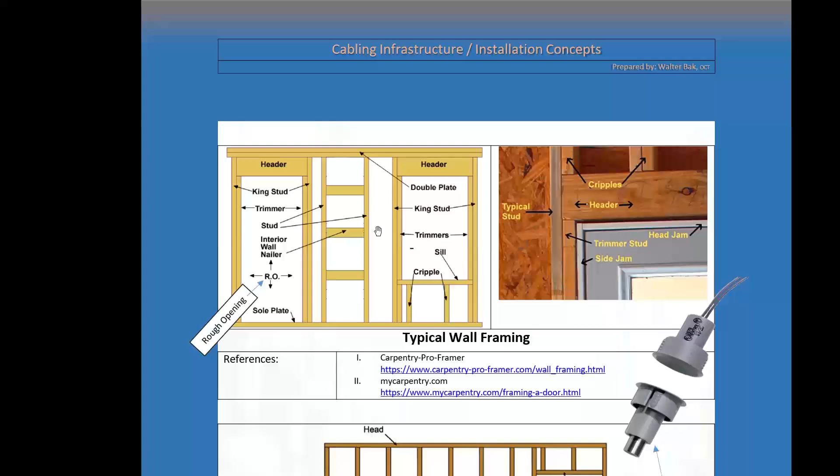Any kind of wiring has to have independent suspension from any of the ceiling structure, like the ceiling tiles, right? So that said, let's go in to see what we can expect. I'm going to divide this into more than two parts, but I'm going to start with the differences between residential and commercial, which also splits into another two aspects: framing.

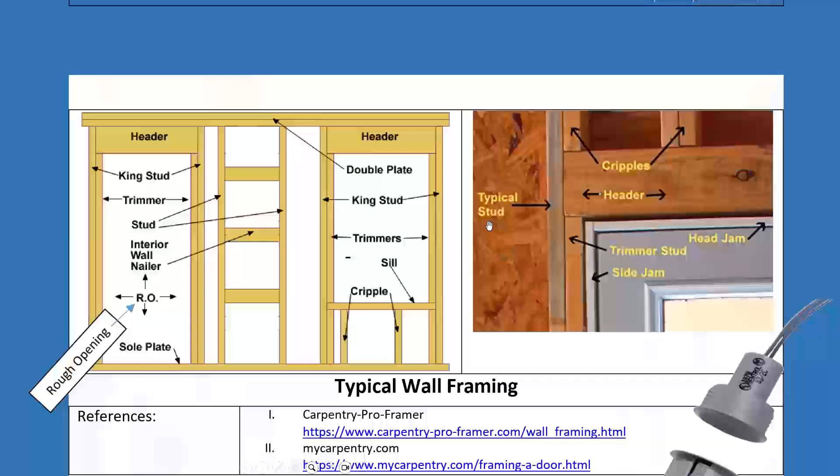The framing that we're going to be dealing with is either going to be timber wood framing or steel framing. Slight difference between those two for us, okay? We're going to talk about what we are interested in as far as the differences between those two. Since for us the timber framing is more complex, I'm going to spend a greater deal on discussing the timber framing structure than the steel, because steel is actually quite easy for us. However, it's mostly done in a commercial

setting in Ontario. Here in Ontario, the business structures, stores, malls, whatnot, most of the framing you're going to find is steel. However, if you go to some of the western provinces, I don't know about the east, I have never been there, but I've done some installation in the western provinces, then residential or commercial, you're going to find a lot of timber. So that's what we can expect when we go there.

So when it comes to typical timber installation, what is it that we're up against when installing wiring? Rule number one for us is try to get into the window of opportunity as far as timing. Especially in a residential setting, we want to be there with our cabling before the drywall gets put on. So here is the bare framing, and we can see what's there. We can install our devices.

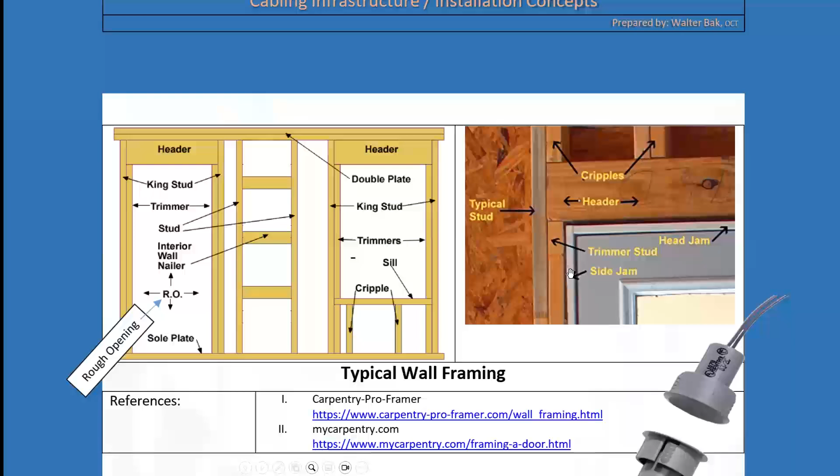Some of the more difficult or more complex devices to install would be security devices. For example, here is a security alarm, a so-called door contact. This one is a flush door contact as opposed to a surface mount door contact. So here's the door contact and here's the door. Put the door contact on the door. Put the ball in the net, right? Simple as that. Well, if we are there before the drywall gets put on, then we have a fighting chance, right, with the timber framing.

When we get there after the drywall is installed, then we're going to have a little bit of a conversation with the client, because if this needs to be installed the way the client wants after the drywall is put on, then we're going to have to talk about the possibility of some drywall that will have to be disturbed here and there, right? And if the client doesn't want that, then we can't do the job, or we can go to the alternative, wireless devices. Sometimes we can get away with that, sometimes we can't.

There were a few jobs in my past where the deal didn't go through because the client wanted to do residential. That's why I was always trying to stay away from residential, as far as retrofitting goes, when people are already living in the house and they need to install some things there. You have to go there, take your shoes off, their son and daughter are eating sandwiches while watching TV, and there's some kind of a fluffy dog that tries to sniff you all around. And then you're going to really have to spend a lot of time doing the wiring.

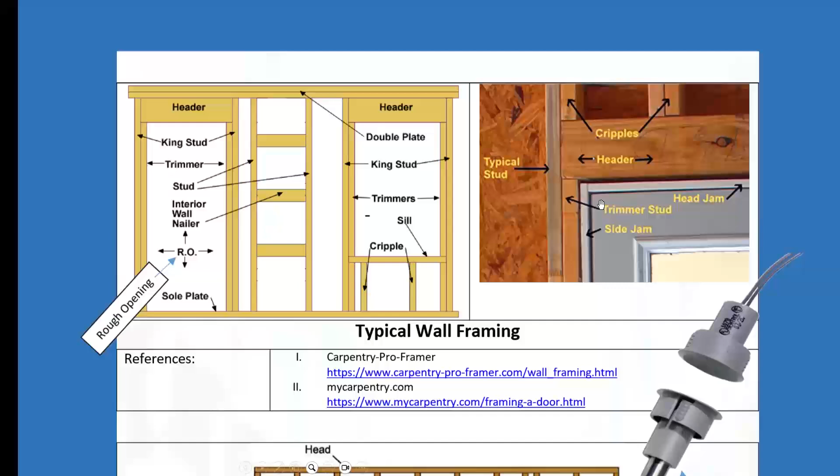So, what is it that we are dealing with? Here's a typical wall framing, one of the scenarios here. What do we have on the bottom here? We got a sole plate. Then on the top we got a double plate here. That's timber, that's wood. Well, 2x4, 2x6. It's not exactly 2 inches by 4 inches. 2x4 is slightly different dimensions, but close to that.

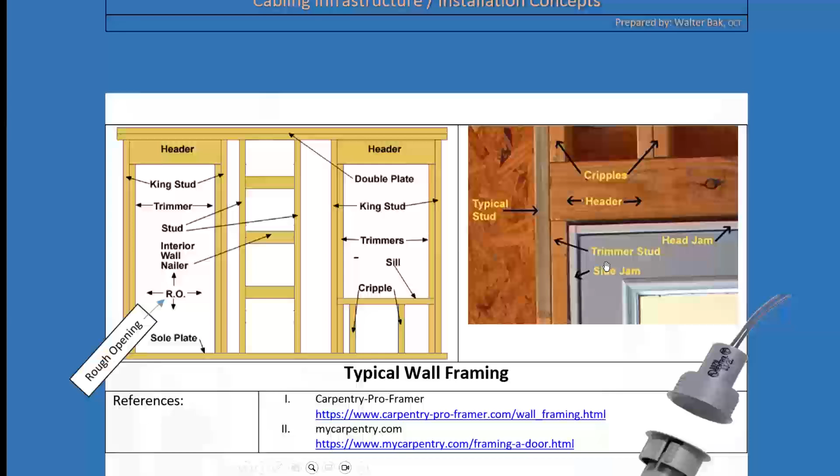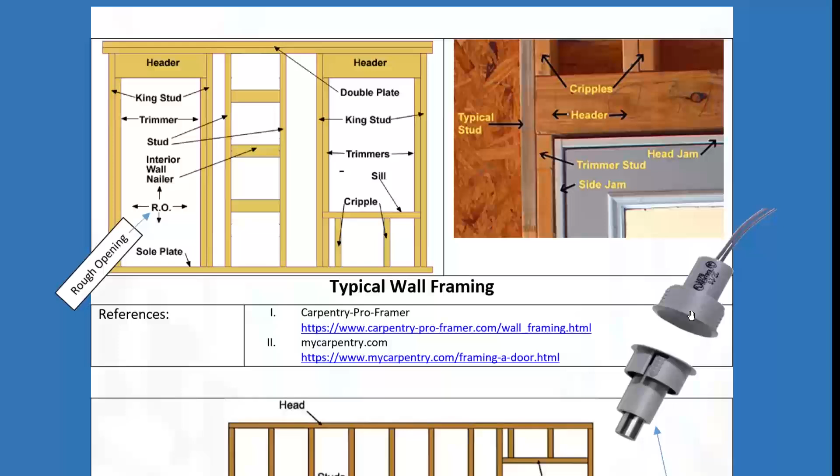Right? So we need to drill through some of the structure. So, for example, if we are to install a door contact, and basically this is in security alarms, this is called a door contact. What do we have? We have a reed switch. What's a reed switch? A reed switch, it's like, for example, a saxophone mouthpiece, there's that reed there. So the switch is in that form. When you bring that magnet close to it, the switch closes.

When you bring the magnet out of the way, then the switch opens. So it's a dry contact switch, passive element. It only requires one pair to operate, and it does not require power to operate. Right? It's just a switch that closes or opens.

How are we going to install this? Okay, this wired part is going to go in the framing here. And this magnet is going to go right in the door frame. So when you open the door, the magnet goes away from the switch. When you close the door, the magnet is going to be in close proximity. So that's how this switch operates. Well, how is it that we're going to wire that?

We have the opportunity to either drill through that door framing here, and maybe drill here, through here, and then you have some sort of freedom of how to run the wire further, or you can go all the way up here, and then you can go either into the ceiling space, or you can go into the space between the studs or the framing, and you can take it up or you can take it down depending on the situation.

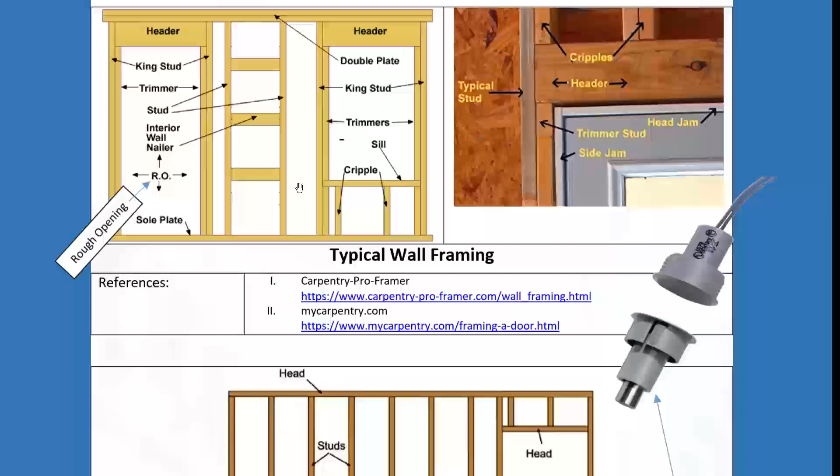So, I'm not going to go through every single term here. I might ask you on the test, and I'll make sure that you have access to this thing. So I might ask you, what's this, what's that, what's the other thing, just to get your attention towards this kind of stuff here. Right. Here's another timber stud situation.

Here's a sole plate, and here's the head or header, and here's a header. And here's something that's called the studs. Now, when it comes to timber installation, you're going to have those sometimes called noggings, quite often here referred to as horizontals, or quite often you're going to hear the term on the construction site, horizontal studs. They are part of the timber structure, but see where the problem is here now.

If you're running your cable from the top, and let's say the drywall is already on, you're only able to run the wire right to this horizontal stud. So if you're running cable from the top and you want to install a jack somewhere at this location here, you're going to have to do some gymnastics. Is it impossible? No. But you're almost getting into a surgical procedure kind of stuff.

So just so you know, with timber framing, very rarely is this not going to be there. You're going to have those horizontal studs to deal with. I'm just telling you so you don't run the wire here and then find out that you're not able to get into this spot. So try to get from the bottom, right?

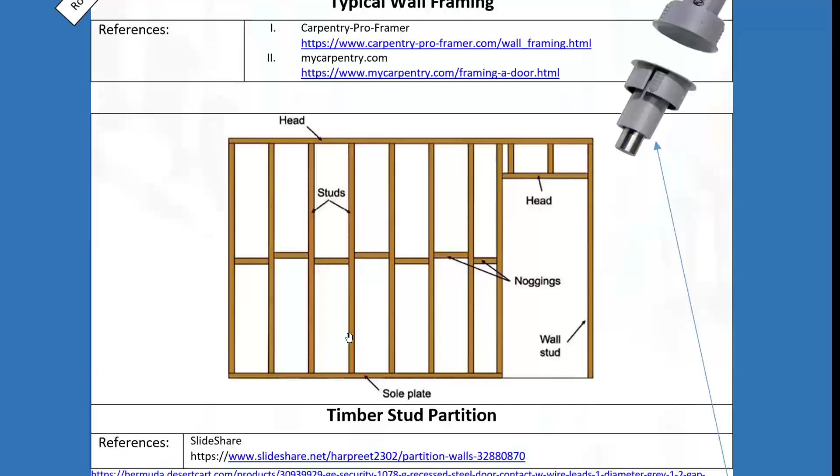When it comes to steel framing, quite often you will not have those horizontals. So you're going to have quite open cavities all the way from the top to the bottom. And sometimes the ceiling heights in some of the warehouse space in the back of the store or storage space, some of those walls are 20 feet high, right? And you're going to have an open space right here.

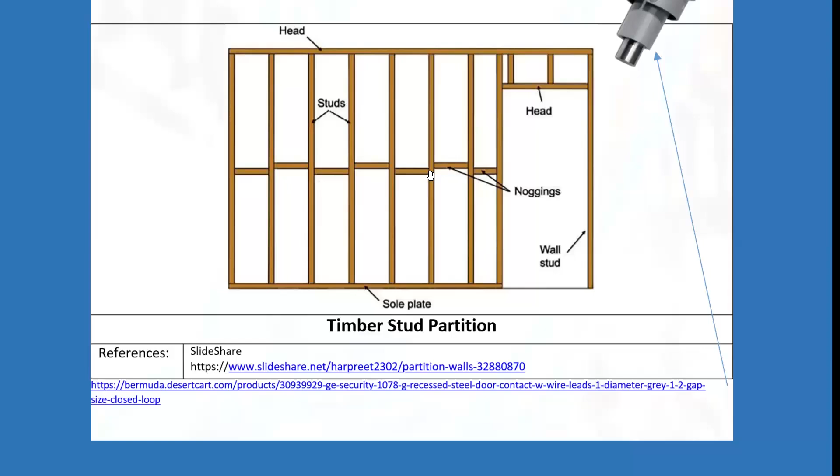So you can drop the wire, and with gravity, it's just going to end up right here, cut the opening for the jack, and there you go. As they say, Bob's your uncle, right? So that's as far as steel framing. Timber framing, you will have those horizontals for sure.

That is, you see, that's the first slide that we had. All right, here's the second slide.

All right, noggings, and this is what I was talking to you about: horizontal bracing pieces used between wall studs or floor joists to give rigidity to the wall or floor frames of a building. Noggings might be made of timber, steel, or aluminum. Although, as I said, when it comes to timber framing, more likely you're going to find those. When it comes to steel framing, more likely they won't be there. If made out of timber, they are cut slightly longer, so they fit there nice and snug, so they're not going to fall off.

Here is another thing that we're going to have to deal with when it comes to installing wiring. Not only are we going to have to deal with the horizontals, but quite often you're going to have to deal with the insulation that is there. And mostly, although it's not a rule, because a properly built house will have insulation in the interior walls as well. An interior wall would be a wall that has a room on one side and some other room that is inside the house on the other side. An exterior wall would be a wall that on one side there's the inside of the building, and on the other side is the outside of the building. So that will be the exterior walls.

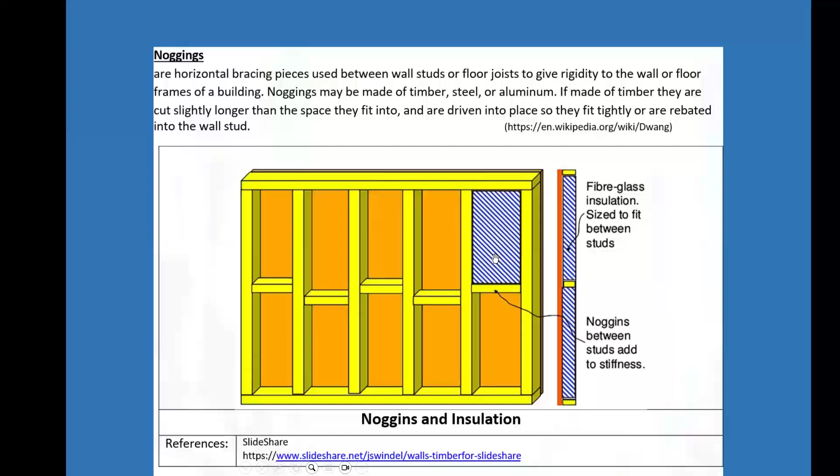It might, all right? So again, the best thing is to install the wiring before the drywall comes on. Sometimes you're going to have to install some additional wiring after the whole thing is built and the drywall is installed and painted. So just so you know, yes, there are ways to do that, but it takes more time, and you have to be more careful. You have to know what's behind that drywall. It helps you a lot. Okay.

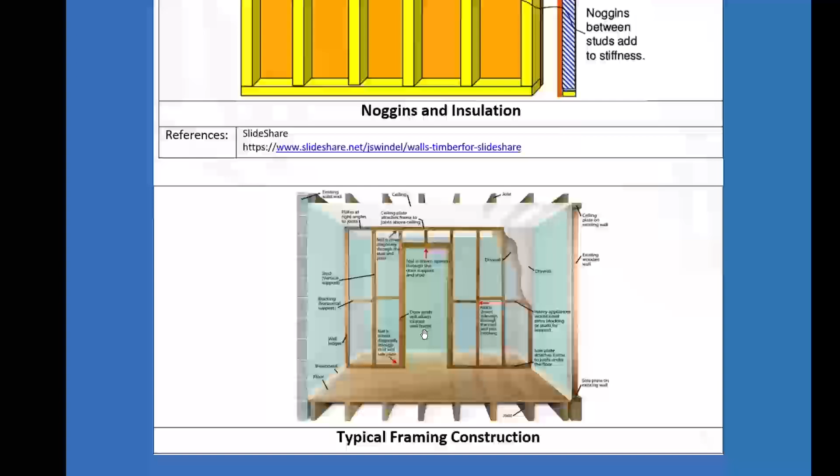Here we have a typical framing construction, mostly residential, and sometimes it could also be a commercial setting. Sometimes you're going to have timber framing installed on the cinder blocks right here. This is the outside wall. And you're going to have a little bit of space to run your wires. Sometimes you're going to find the drywall mounted right on the cinder blocks. There will be no space for you to run the wires.

Although, in some cases, if you can get access from the top of the wall here, where there are those openings in the cinder blocks, and those openings are aligned, you can drop a steel chain and it's going to find its way where it's supposed to. Just remember that sometimes, the way the construction is done, up to five of those bottom cinder blocks are filled with concrete during the building process.

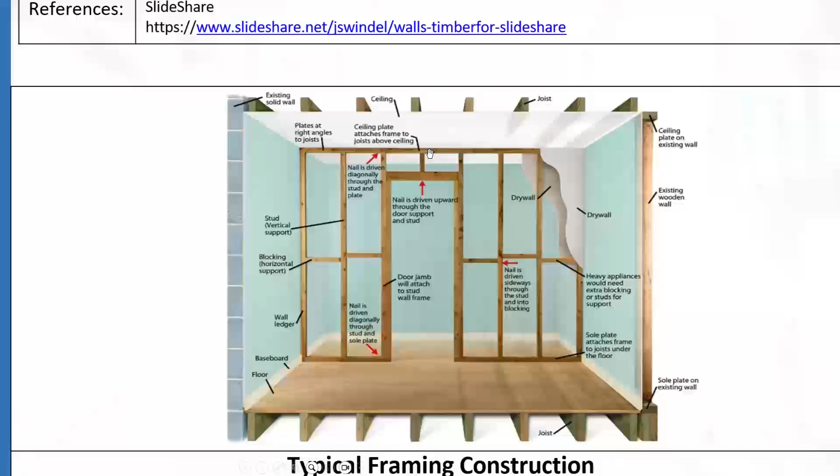Then what we have here is a bit of framing happening here, so nothing new. And here's how the drywall is being installed. So yes, sometimes you're going to have a little bit of space to run your wires. This will be the interior wall, and this would be the exterior wall. Now, as you can see here, there is no insulation, but we do have horizontal studs here. Can we go through them without disturbing? Yes, we can, but it's a very fragile procedure, not for the faint of heart. No, I'm saying that with a grain of salt here, right? Yes, you can do it, but

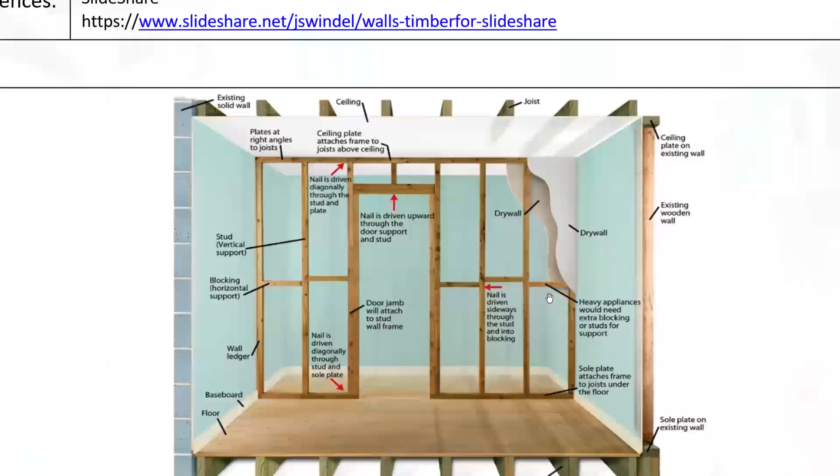whenever I had to do that kind of stuff, I would always say to the client, look, just so you understand, this is what you requested. There is a slight possibility of the drill bit coming out through the drywall. Just so you know. And as soon as they agreed, yeah, I can do it. If they don't agree to it, then look, I can't guarantee, right? So sometimes it will be a somewhat stressful situation when you have to go through that.

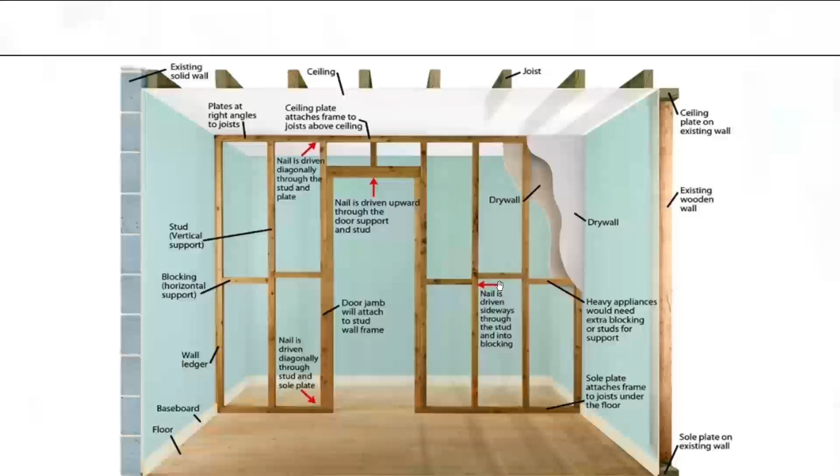And it feels so good when you drill through that with the flexible drill bit, for example from here, and you drill because you don't see what's going on here, and you can see that the drill bit went through, and you look at one side, and it's nice and clean. You look on the other side, nice and clean. Oh, it's a really good feeling. All right? So yes, it's possible to do that, and I'll show you how. Well, of course, there would be those joists.

Now, when it comes to running the wire, let's say this is a basement and somebody did the drywall all the way here. Well, if you really want to install some of the wiring, then it's a little bit of an inconvenient situation, right? As opposed to if there was a drop ceiling with ceiling tiles, you just pop the tile and you have all the access. Now, sometimes you can get away with this if the wall just ends at maybe a furnace room or something like that. Then you can have the open one side here.

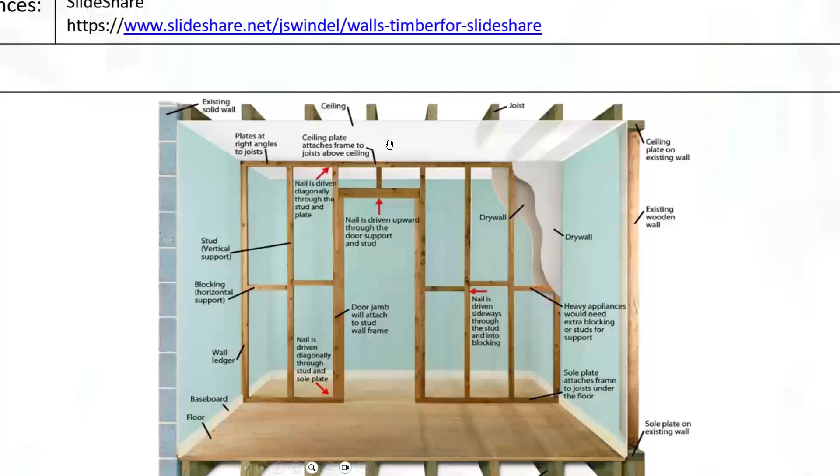And depending on how the joists run, you can run the wire from here to here, but you wouldn't be able to run the wire from here to here in there. But you can just run it outside and drop it in there, push it in there. So depending on how the joists are positioned, you might want to take a look with a flashlight and see if there's anything else there to run your wires. Now, with all this, we're not talking about service cables. We're talking about data wires.

Let me check the time, how we're doing with time. We're doing good.

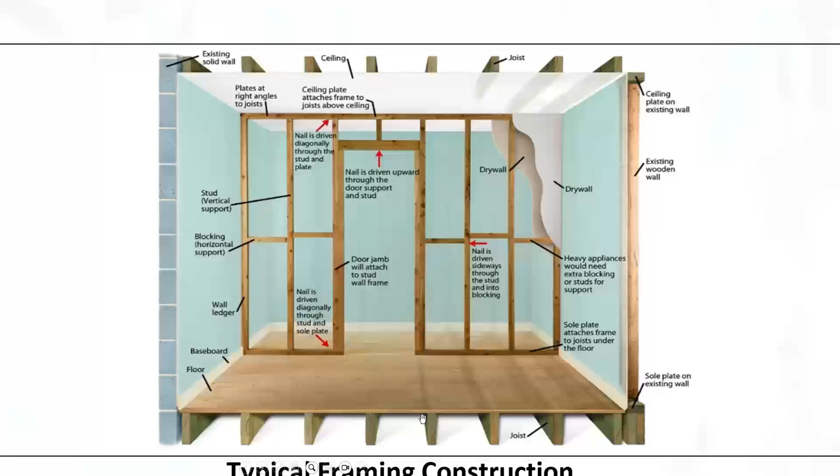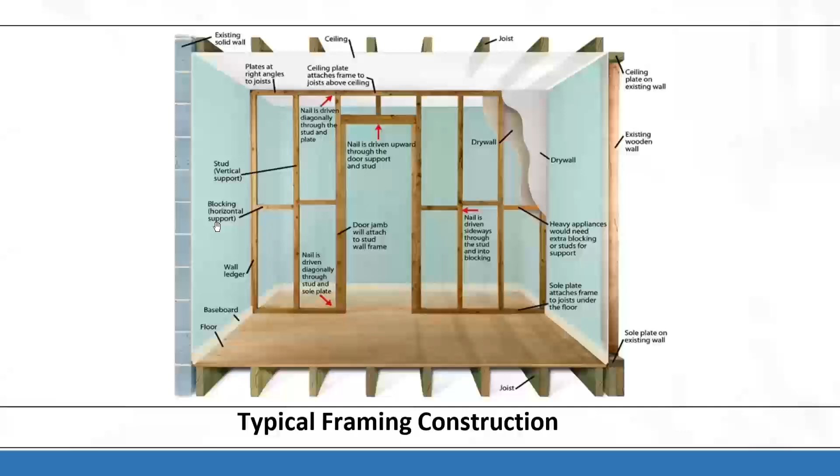All right, so that goes with the top and it goes with the bottom as well, as far as the joists. Now this here is a cinder block outside wall, or exterior wall. There are different other types of walls. If there's siding there and just framing and whatnot, sometimes you don't have the cinder blocks. We're going to have to be mindful of certain things. There we go.

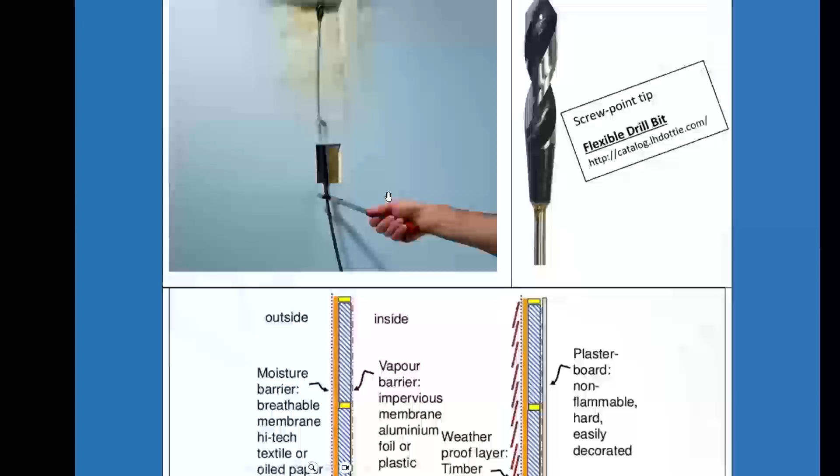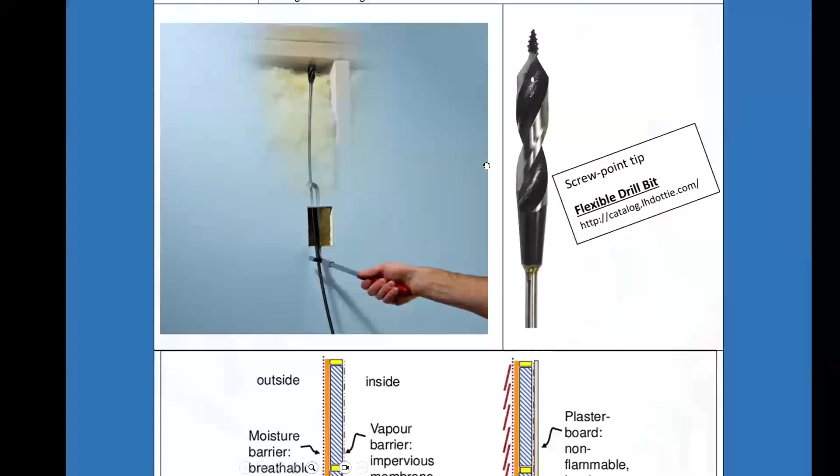Here is something that is called a flexible bit. It's a flexible drill bit. It can be 6 feet long, it can be 8 feet long. Best if it has a screw point tip, because you can just tap it into the timber framing, which is softer than metal, and it's not going to dance around when you start drilling.

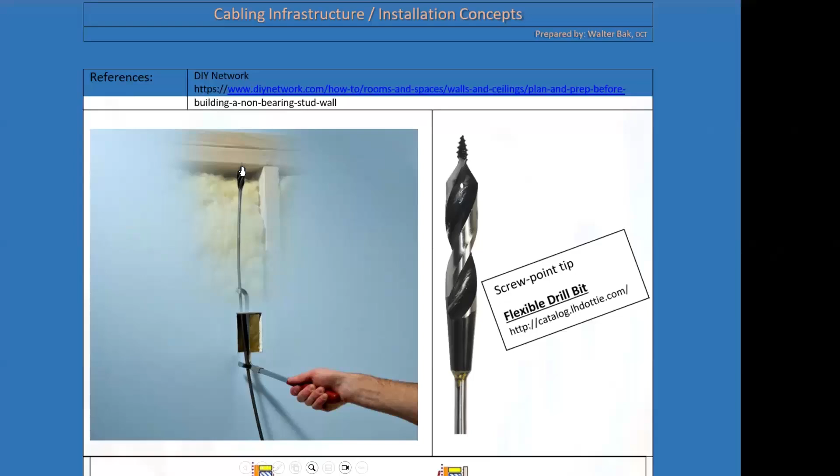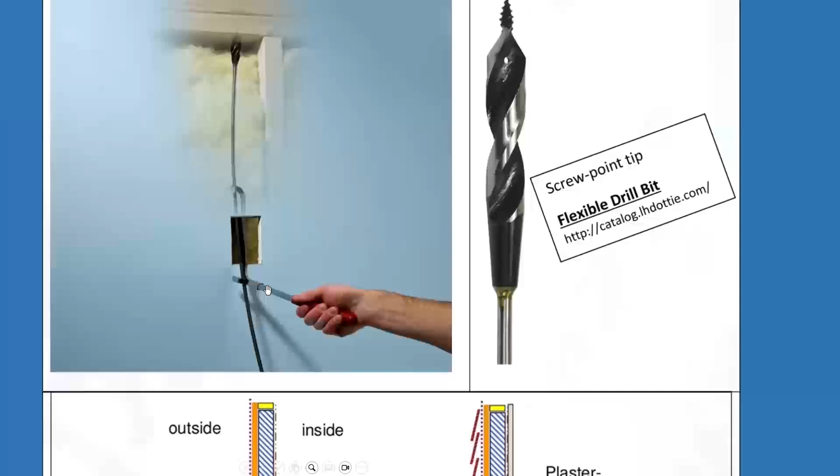Now you can have those guides, drill bit guides, and that's how this thing is being used, because if you just cut out an opening for a jack or for a plate, if you push that drill bit in, it's probably going to end up at the joint between the drywall and the timber. And when you start drilling, the drill bit is going to take the path of least resistance, and it's going to come out through the drywall, almost for sure.

So you need to make sure that this thing is spot on, straight into the timber. And this kind of a drill bit guide will help you. With time, as you gain experience, you can kind of get the feel of it. That's all I can say to you, right? Of how to find that center spot.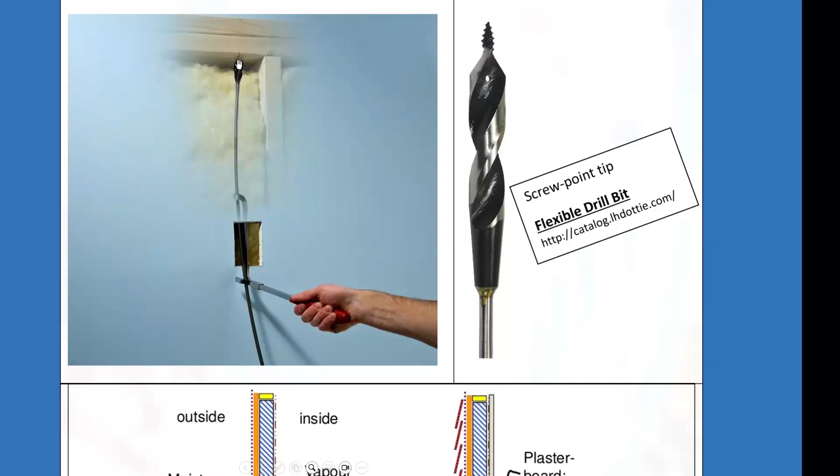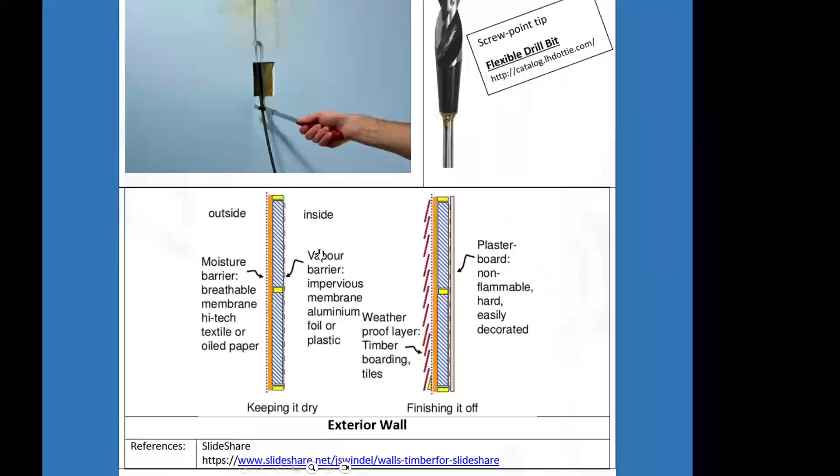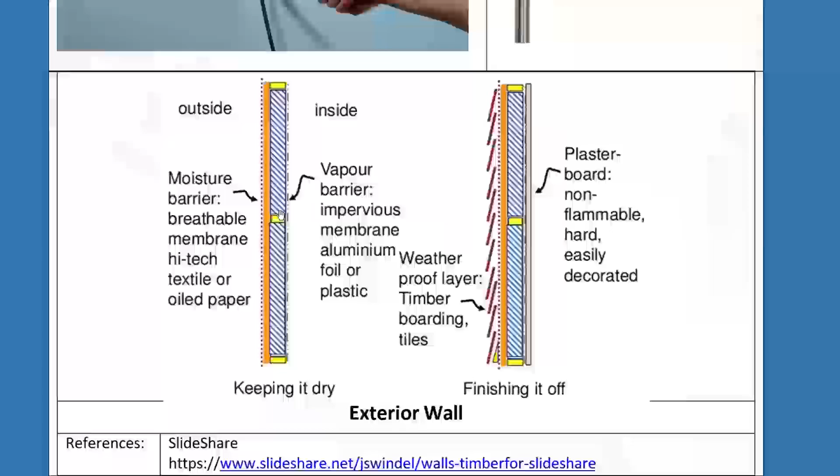Now, here's an exterior wall. There's a little bit different situation that we're going to deal with. This here could be external wall, this could be internal wall. Let's talk about the exterior wall. What is it that we have to deal with? Well, here's the wall. Here's the outside. Here is the inside. The outside will have moisture barrier, breathable membrane, high-tech

textile or oiled paper. The idea, just to make a long story short, is that yes, you want to have good insulation between the outside and the inside. However, you want to have some permeability, which means that wall has to breathe a little bit for the purpose of all kinds of mushrooms not being able to grow there.

So that's why sometimes when there would be an old construction from 80 years ago, 100 years ago, and the house was built a certain way, so the walls breathe a certain way, and then you come over and install brand new windows that were made in 2025, and all of a sudden you get black mold around it. Yes, it's possible because you're dealing with two different worlds. Now, the wall has to breathe, but it also has to block things, but just breathe at the right rate.

Now, inside, here's something that's called a vapor barrier. Impervious membrane, aluminum foil, or plastic. And again, the purpose of that is to insulate the outside from the inside in a specific way. So yes, you have some kind of airtight installation all the way around, but the wall still breathes in some proper way. And then you're going to have maybe a siding or something like that to protect the outside wall. And over here you're going to have plasterboard, non-flammable, hard, easily decorated. Okay.

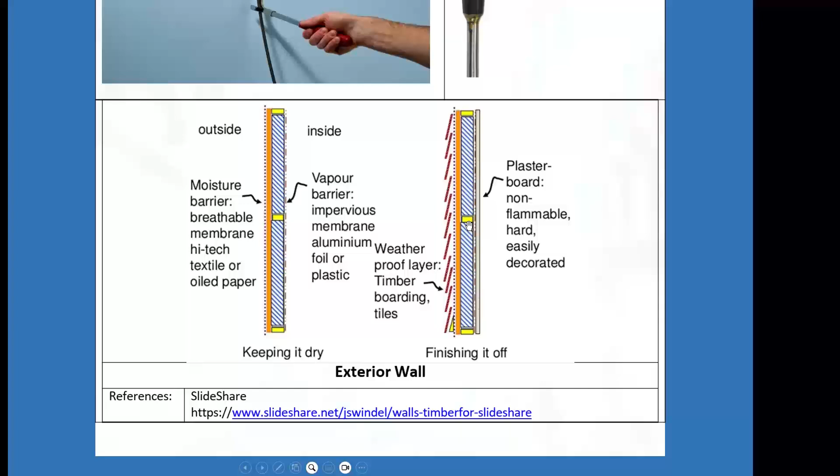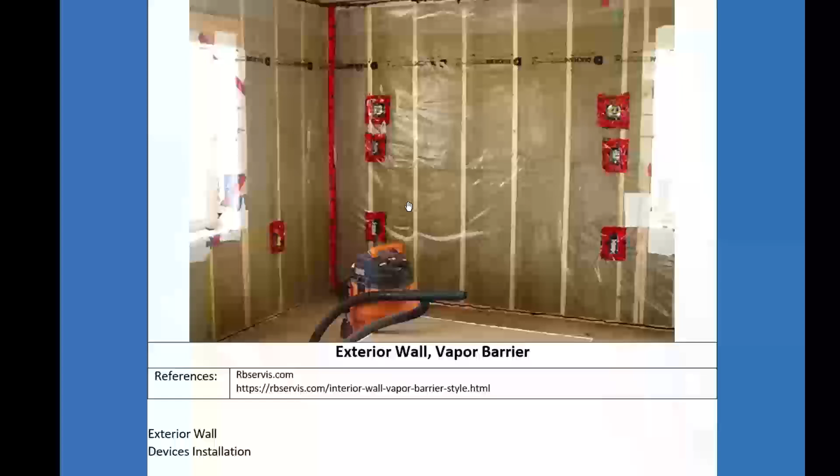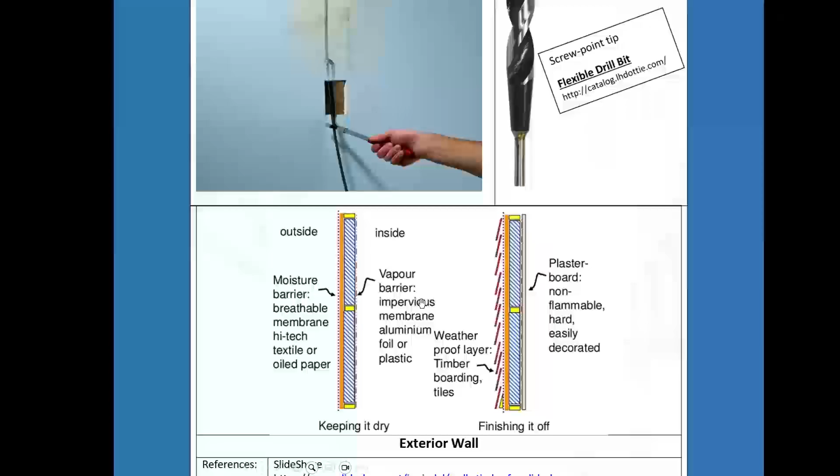And over here you have the insulation, and over here you have, of course, the good old famous vertical studs that we all love when pulling wire. This is, right here. Here's what we're talking about. The vapor barrier, impervious membrane, aluminum or foil, plastic. Well, that's what it looks like.

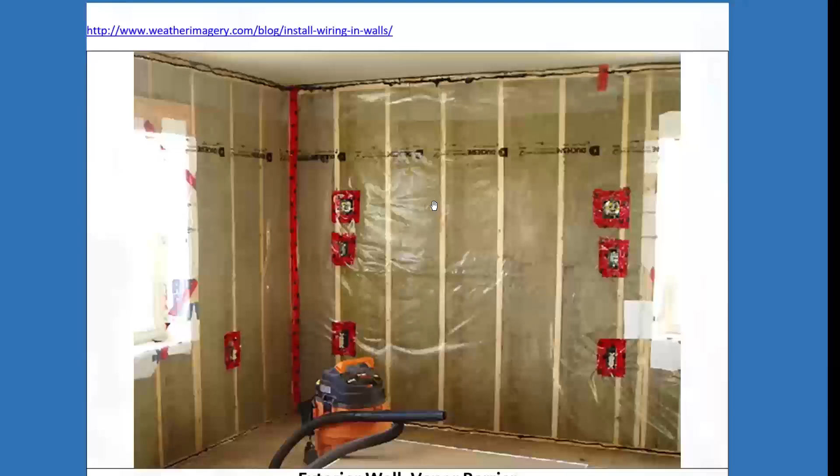What do we have here? You can tell that this is an exterior wall because you can see that there's insulation between the studs, and we have that long name that I just said for the vapor barrier, plastic foil. And any of those cracks or openings are sealed with the tuck tape. That's the red tape that's there.

A lot of red tape when building a house you have to go through. All right? And that's not this kind of red tape I'm talking about, but this one also.

All right. Now you can see that even any of those openings for devices or device boxes, they are also sealed, including the back of the box. It's also sealed, so everything is sealed. You need to have that thing sealed, or else, and I'll show you what or else means. So whenever you need to add, because sometimes you're going to get in there, you're going to have to run your wires when this thing is already installed. So here's what you do to actually,

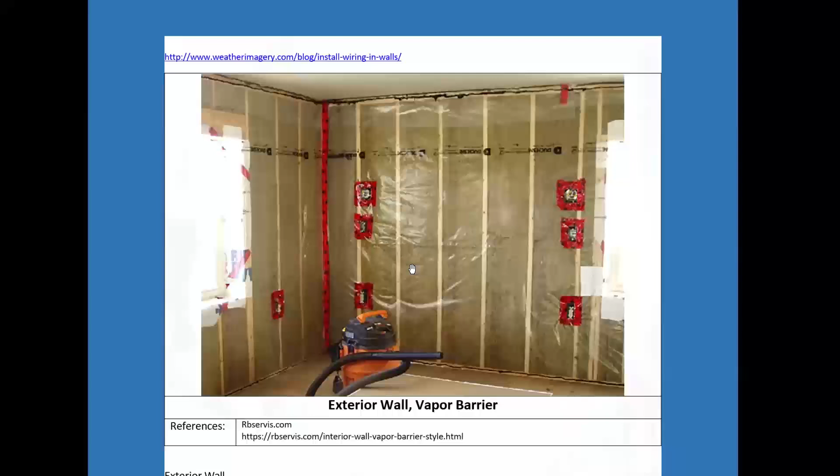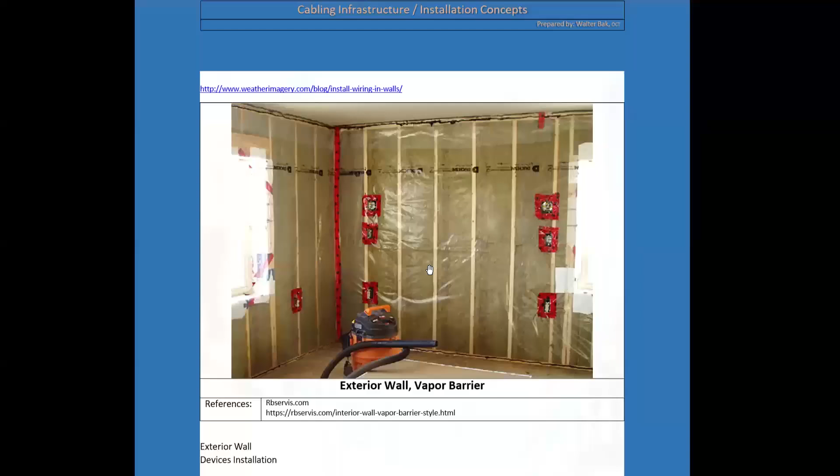well, make yourself look like somebody smart, as opposed to somebody who is not really smart and not getting paid, or maybe getting sued. No. You need to know what to do, and you need to know what not to do. What not to do is just go at it, install the device box, and leave that thing disturbed and walk away. That's what not to do. What to do is,

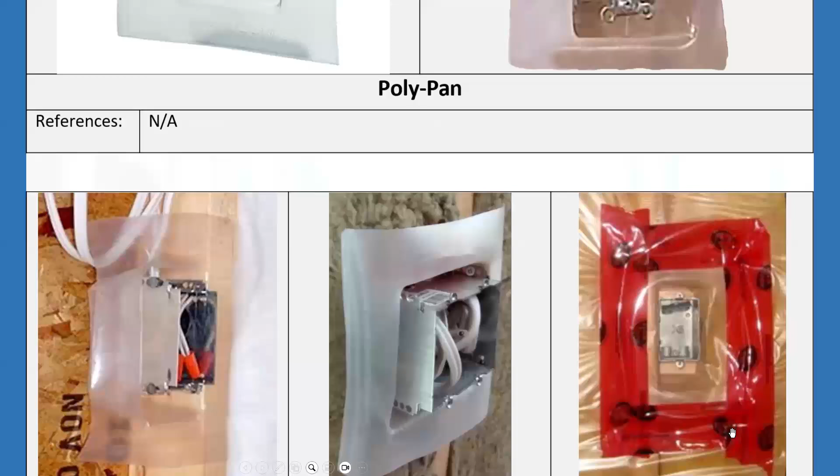here's something that's called a poly pan. You can go to any hardware store and you can find those in the electrical section. You can buy them by boxes and they're cheap. Right? It's called a poly pan. If you want to install a device box, now this is electrical here, but it applies to data as well. You install the poly pan and you seal it with tuck tape. Not duct tape, tuck tape. Right?

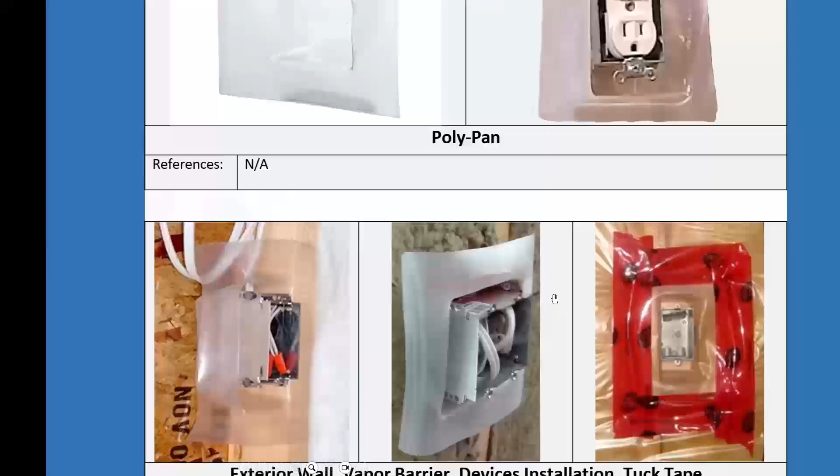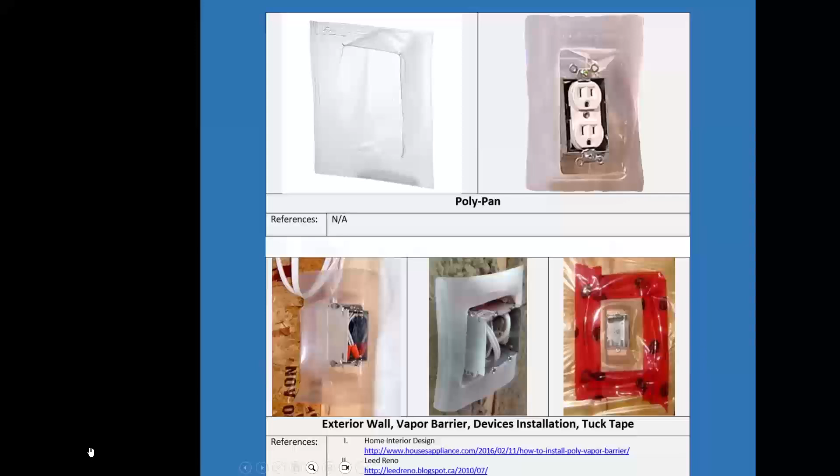In order for the whole thing to be installed. And if you need to disturb that poly pan to run wires in there, you seal that as well. It's a must for the exterior wall. What happens if you just do it carelessly? You're going to end up with something like this. It doesn't happen overnight, but it can happen within a year.

It's the black mold. I'm not a doctor, so I'm not going to give you all the details of what black mold does to you. But I also don't have to be a doctor to tell you that please do not eat rat poison because you're going to die. Right? So same thing here. This is almost as bad as rat poison. I can say that it's carcinogenic.

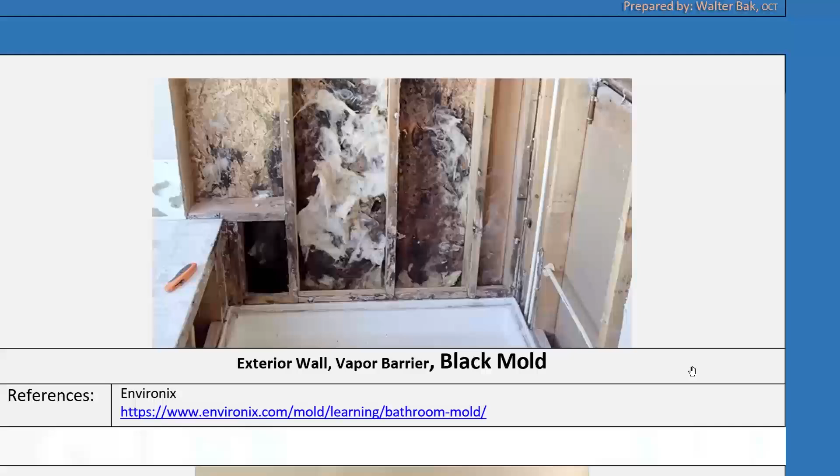As soon as you smell that smell of black mold, which is like a moldy basement kind of smell, a stinky smell, here's what you do. Just get out. Don't stay there. Do not breathe that. Just breathing that air can actually be hazardous to your health. If that happens, then you need to make sure you get some qualified people coming in there and treating that, removing the black mold. It's not easy to remove. That's all I'm going to say.

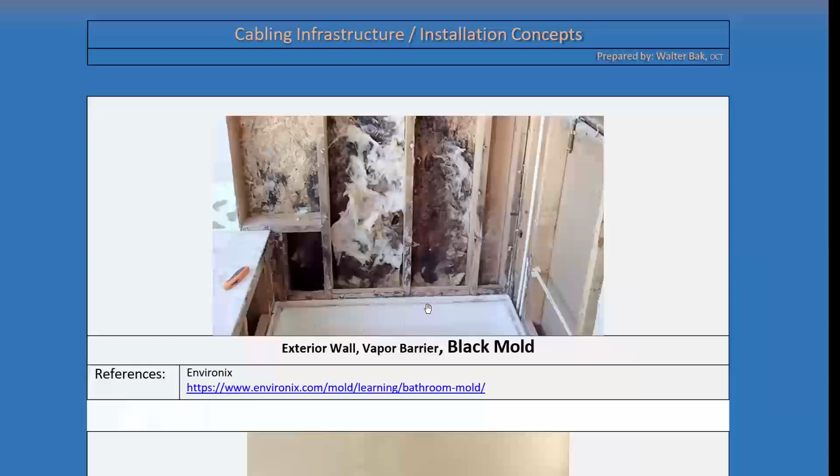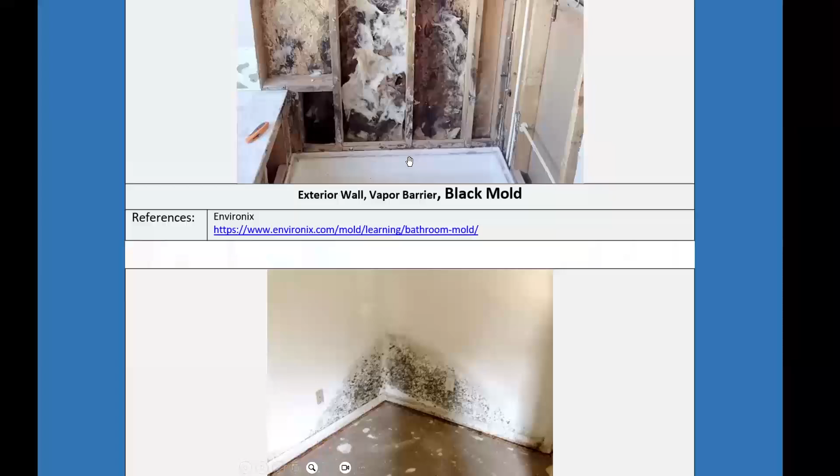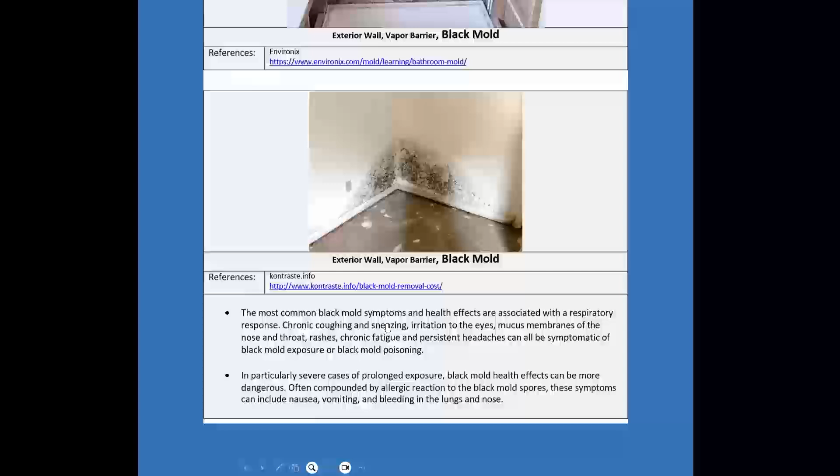Signs of black mold right there. But before that happens to drywall, you're going to have this for a long time. Now, you can read that when you download this thing, symptoms of what happens to you when you get exposed to black mold. Again, I have limited expertise on that because I'm not a doctor of medicine. However, there are some things that are common knowledge, and this is as far as I'm going to go with the descriptions.

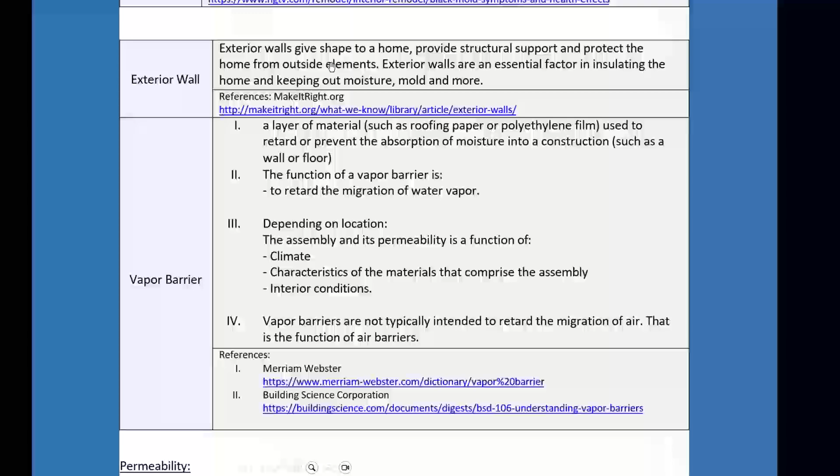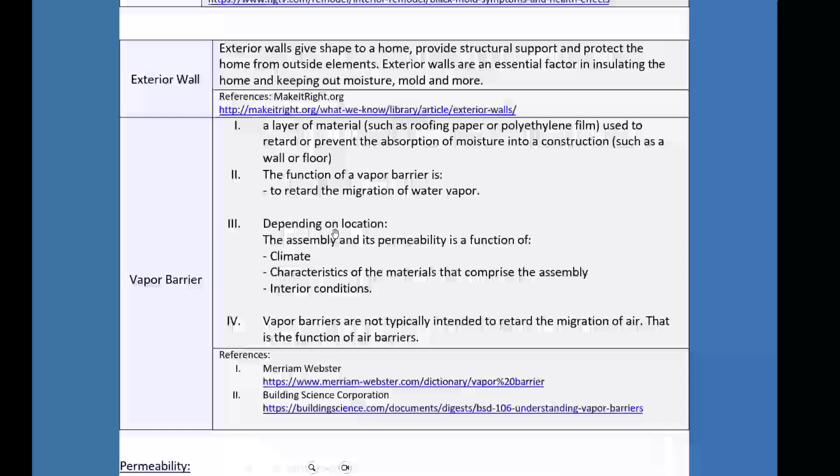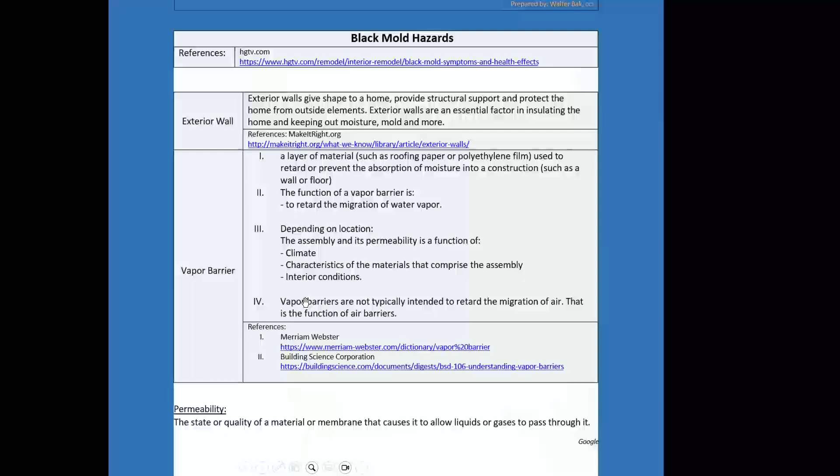Exterior walls give the shape of the home, which we were talking about. A layer of material such as, okay, this is what we were talking about. You can just read that and put the whole puzzle together in your head. I'm not going to read through this because we just talked about it. Reading it is just going to reinforce the knowledge. And there are some reference links when it comes to that.

We're going to talk about the stages when it comes to wire installation. We just talked about the structural concepts, and next time we're going to talk about the stages of wiring installation. And why do we have stages? Well, it's the logistics, it's the structured cabling concept, or the network cabling concept. So you can have some sort of a structure so you can be efficient at doing your job, so it takes you a month instead of 6 months. That's one thing. Two is it helps you with billing.

If you work for somebody else, then the office worries about the business logistics. But if you have a business of your own, recognizing the stages of the job being performed helps you with the finances as well. What do I mean by that? If you can establish a certain stage, for example a rough-in stage, which we'll talk about next time, then you can bill the client to complete a certain stage of the contract.